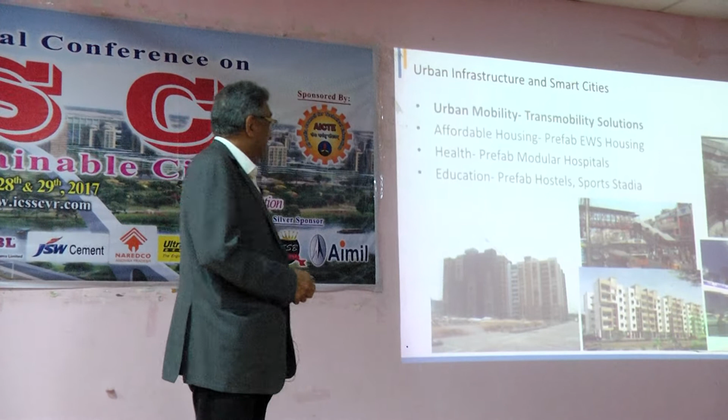Broadly, it's kind of our experience, my experience you can say, I'm going to talk about. And it's very hard stuff, like hardware. It's really about construction, moving men, materials, that's the kind of stuff. It's a nice counter position to the electronic stuff, but this also is very relevant.

The areas in smart cities that we are active in is urban mobility, what I refer to as a trans-mobility kind of solution. Then there's also affordable housing, which we are very active in, but I don't have time to present it today. We are also active in the health area, particularly in terms of prefab modular hospitals. The fourth one is education. We have built a lot of sports stadia, and now we are sort of aggressively pushing for hostels, nice hostels. Okay, that's the idea.

See, trans-mobility, in that, my kind of personal experience, I talk to you particularly. What we talk about is any urban infra, urban transport particularly, starts typically in an airport terminal or in a railway station. So I'll just briefly talk to you about that kind of stuff.

See, we did the Mumbai airport, by the way. This is Terminal 2. It's an interesting project because it was in an existing, running airport. It was a 33-acre roof to be built with a laydown area of only 0.75 acres. It was considered one of the most challenging projects probably done in the country.

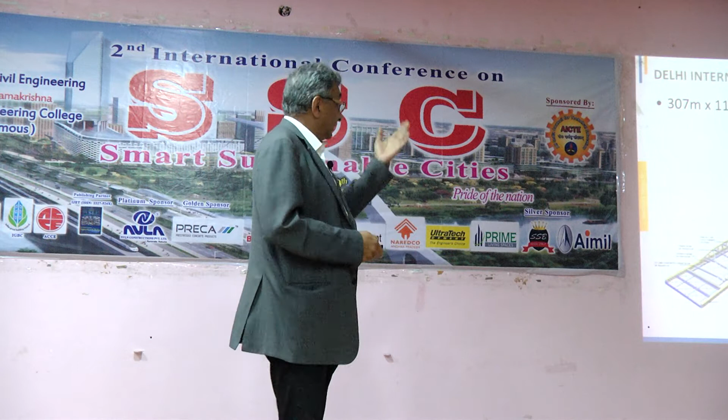I also want to very briefly dwell upon the Delhi airport, which was done earlier by us. This was completed in 2009. That's also very large, by the way—22 acres of roof, quite an extraordinary structure. There the challenges are of a completely different kind. We had a very large air side and land side, about 8,000 tons of steel, not such a large kind of thing.

There we lifted 1.5 acre segments using 16-point synchronous lifts, and that was quite challenging. All you guys, particularly civil engineers, will realize if you start lifting anything by more than 3 points, you start to introduce distortion. So we were lifting with 16 points in a single lift, and each of these lifts weighed 670 tons.

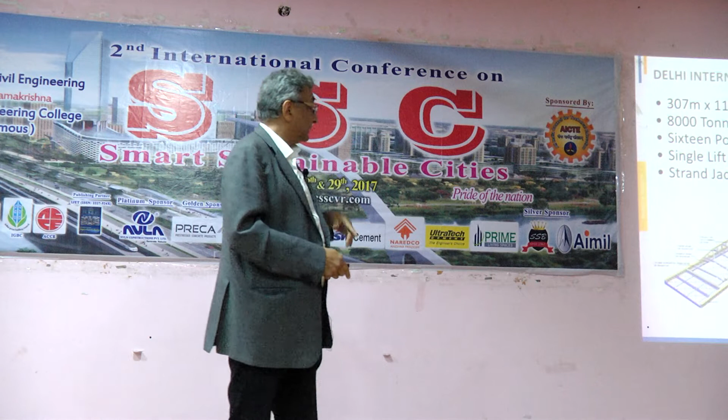We used strand jacks and a lifting cover. Here what we did was assemble the structure on the departure level slab next to the column, lift it into position, laterally move it, and lower it back.

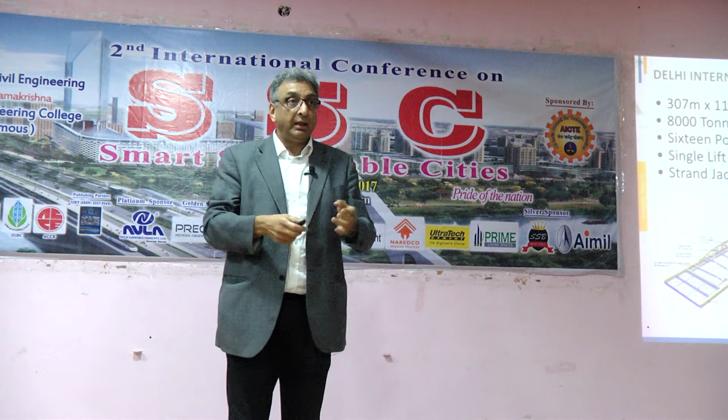Why I'm bringing these points across is that building is really the biggest challenge, not designing. Designing, if you think of it in the normal sense, is a challenge, no doubt. But when you start to think of the entire life cycle right to the end, and work backward, you realize how many points you have to take into consideration right in the beginning. That is engineering for us. Because we are an engineering school, I can comfortably say that it is engineering for us.

So there again, I have a small video just about the lifting. I won't stay too long because we have a paucity of time. What I explained to you: it went up to a certain height, tilted, then moved up and laterally moved across. I'll just skip this.

On the air side, we had a bigger challenge because there were a lot of other structures above the departure level slab, if you've seen Delhi airport you'll find. So there we had to pull the structures. Equally challenging, but in a slightly different way, because we were able to build a kind of scaffolding. We had stainless steel skids and stuff like that. We were able to do that. Again, I won't dwell too long on that.

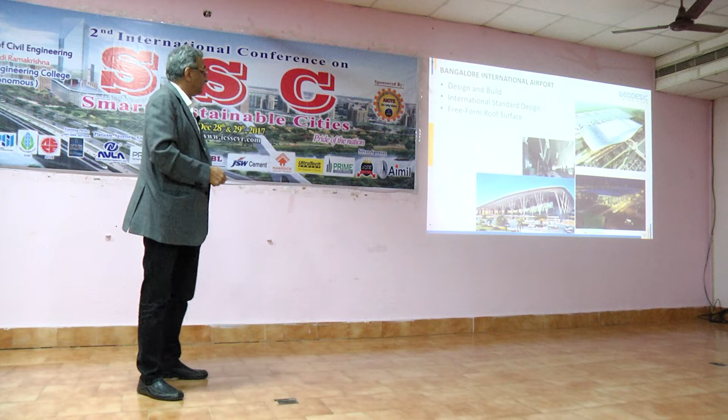The more recent job we have done is the Bangalore airport. If you guys have seen it, it's quite an interesting project—international standard, free-form surface. I won't dwell too long on this job at all.

Now I'll come to my real area, which I'm looking at in terms of what India needs. This is what we refer to as transmobility. The term transmobility we use to represent the billions of journeys happening in the country at any given point of time. That's why we use the word transmobility. Our experience actually started about 10 years ago when I went to Malaysia.

I fell in love with the monorail system, so I built a relationship with them. We got a chance to actually become consultants for the Mumbai monorail. It was good and bad - good because we got a nice job and everything.

Bad because later on I realized that this was not necessarily the most appropriate solution, because only 3 companies in the world really have this technology - Hitachi, Bombardier, and Scomi from Malaysia. So there was a problem with the way it has to be implemented in India.

However, this particular project is about 20 kilometers. Half of it is already running, the other half is also expected to run. We actually brought this technology here, and our involvement was quite interesting in terms of the stations and the depot and all that.

Based on that, we also submitted a DPR for a Bangalore monorail, which never saw traction, but we did a lot of work on it. This was about 6 years ago. We did a lot of work and that really taught us about the way things are.

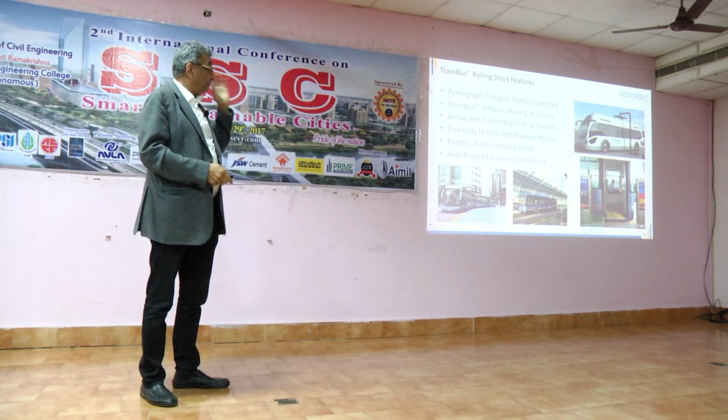But pretty much it's electric, the way ahead is electric. Guideway features again: at grade, single decker, overtaking lay-by lanes. Stations are very important, because station concourses also help you cross roads. That's a very important factor.

In terms of construction, prefab, precast, enough has been said about that, and accessway to stations. What I'd like to talk about is the advantages: it's a primary system in a tier 2 city, feeder dispersal in a tier 1 city, fast and comfortable journeys, high capacity ridership, but very efficient. It is not inefficient, it is efficient.

When I see a metro running empty, I find there's no logic to it — that many cars should not have been running. But in this case, that can be organized: it reduces congestion, has aesthetics, slender structures, minimal land acquisition, and multimodal rolling stock.

What it means is that I can run cars as long as they follow what we call the Trambus protocol — that they become part of the system. You can have your own little car; in fact, the Chief Minister can have his vehicle running through it. Only thing, the Chief Minister cannot have a driver — it has to be a driverless system. Only then can this work.

The moment you have one driver or one pedestrian crossing the road, there's chaos to be expected. Okay, this skywalk system is very simple.

We have done a bit of this kind of work. It becomes a last mile connectivity, typically from a metro station or a tram station. You have an elevated path, typically a double decker, where you have cycling on top and walking below. Sometimes you can even have a single line if there isn't that much traffic. It provides direct access to metro and tram stations, and a safe cycle and pedestrian path.

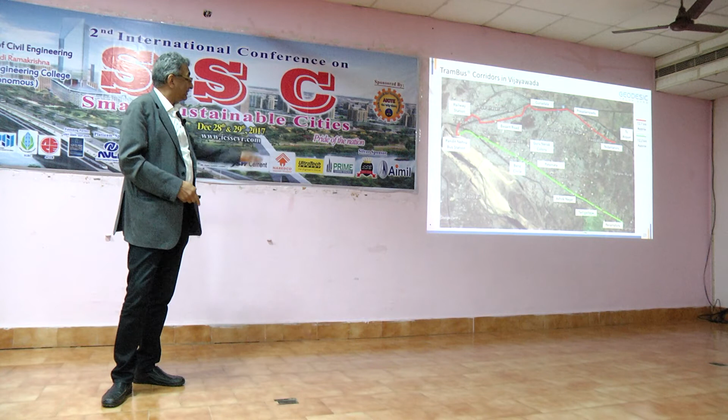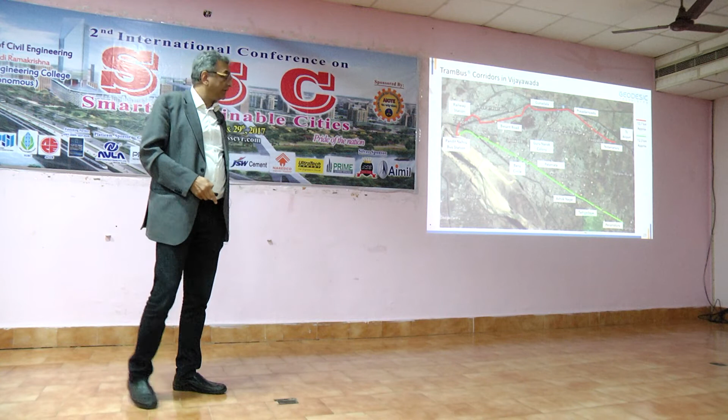This is just the typical TramBus corridors, let's say for Vijayawada, extracted from the web. This is a metro alignment that has been done, but I understand a lot of DPR work has been done for that. So this is the typical kind of thing we talk about.

Very quickly, the importance of engineering. Just 5 minutes I'll spend on what we do. This is a project in Singapore where we did the engineering. These two things are quite well-known structures, award-winning and things like that.

What are the pillars we stand on? One, no doubt I have emphasized enough, engineering. The second is manufacturing, you can call it prefabrication, offsite kind of work. Third is construction. All of these require engineering, but engineering is really the driver for the entire thing.

Incidentally, what you see in the back is also done by us. It's a very wacky kind of structure done for TCS in the Siruseri campus. It's quite long, 405 meters, and quite complex in terms of the steel work and stuff like that. These are some of the various works we have done.

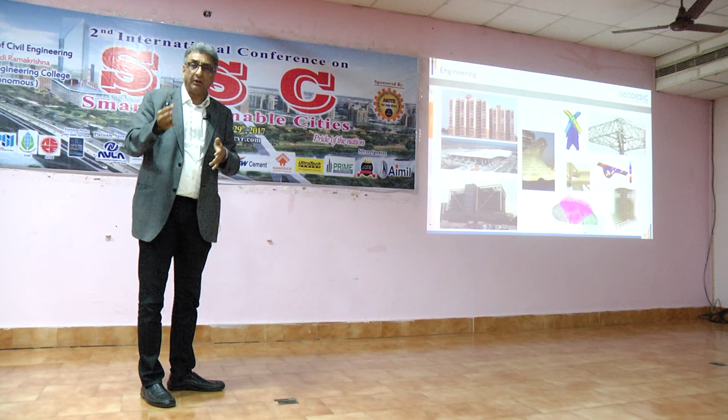We have dabbled in affordable housing, and done a lot of stuff just to see what the future holds for us. This is a very interesting job we have done in Bombay. Complex as hell, every member is unique, every node is unique, every glass panel is unique.

When I was young I had the patience to do all that, but of course we did all this with a computer program. By the way, I need to share one thing with you - we are very lazy guys. So much of what you see, we wrote computer programs to do. We had a program, I was even writing little programs on a Commodore 64 in 1984, 85, very early days for India.

We have all this, whatever you see here. If there is anything I have to do more than once, I write a program. Incidentally, for that project in Bombay, we took 1 month to write the software. After we were able to get it working, every 5 minutes we were able to get a different iteration. This had to be architected - you want like this, you want like that. You managed to get that up and running.

This is our factory. It's not very far, it's close to Hyderabad. It's quite a nice factory, highly automated, it's got robots, it's got CNC machines. But from a construction point of view, it is not a manufacturing widget kind of thing.

These are some of the other works, just so you know that when we talk about urban infrastructure, you must remember rural infrastructure only has buffaloes looking at it from below, while urban infrastructure has a lot of people looking at it. So as engineers, we have a responsibility to make the structure look good from everywhere, not just from the top, but from below also. You cannot use your bridge engineering blindly and apply it to cities, because that's a terrible sin you're committing. This gives you an idea of the elegance that is possible without getting into a knot.